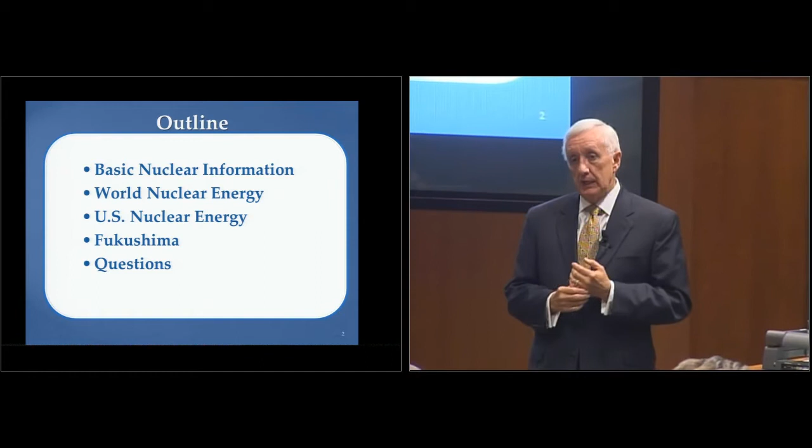It's really stark when you go to the Fukushima Daiichi plant. A lot of people don't realize it, but there's Fukushima Daini, which is about 10 kilometers from Fukushima Daiichi. So there are two different nuclear sites very close together. At the Daini plant, all four units were running, and that particular unit maintained one off-site power source, so they were able to eventually shut those down safely. Daiichi lost everything, and I'll walk through that sequence. That's why you had two sites close together—one had a very serious problem, the other ended up being shut down safely. And then the fun part is the Q&A.

So how many of you have had physics? How many of you have heard of physics? Just checking to see if you're awake.

The thing that really makes nuclear different than other forms of energy is you're dealing with the nucleus of an atom as opposed to the weak electron clouds. So what you do is you go out and find your friendly atom, in this case uranium-235. If that atom is hit with a neutron, it becomes unstable and splits into two parts.

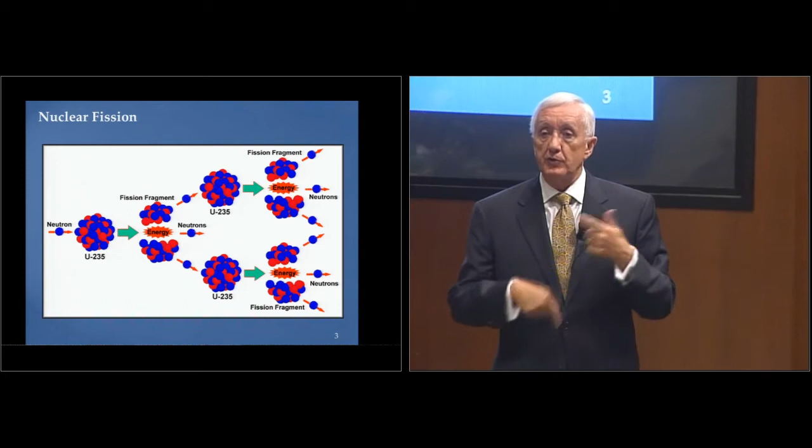Have you ever heard of this equation called E equals mc squared? So you're basically taking mass and converting it into energy. That energy, when you release the fission fragments, you have some extra neutrons left over. They will create other fissions, and so you can create a self-sustaining chain reaction. And so it's a very compact form of energy.

If you look at a number you can write on your hand and impress your friends at cocktail parties: if you create a CO2 molecule, so if you burn something, you create CO2, you get 2 electron volts. Now, you don't have to know what an electron volt is, it's a unit of energy. If you split an atom of uranium, you get 200 mega electron volts. So you get 100 million times the amount of energy when you split an atom dealing with the strong nuclear forces as opposed to the weaker electron forces when you burn stuff.

So if you want X amount of energy, you have to burn a lot more things than by splitting atoms. And that's why that little fuel pellet, about a half inch in diameter and half inch long, will have the energy equivalent of a ton of coal. So a very compact form of energy.

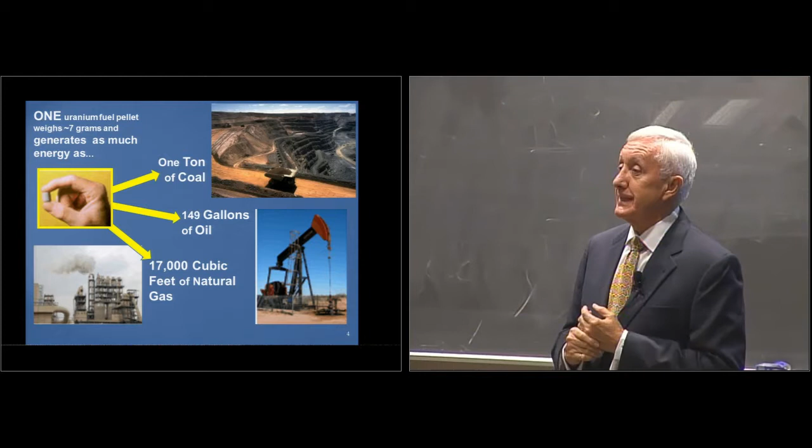I was giving a talk in Dallas a number of years ago to a high school science class, and that little pellet is also equal to 50 gallons of gasoline in energy equivalent. So this student held up his hand and said, 'Do you mean if I put that little pellet in my car, I can go for a long distance?' No, it doesn't work that way. It's an energy equivalent, it doesn't really work the same way.

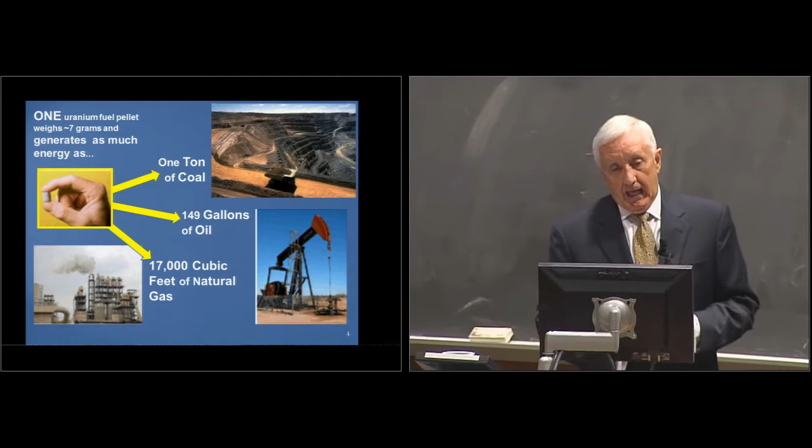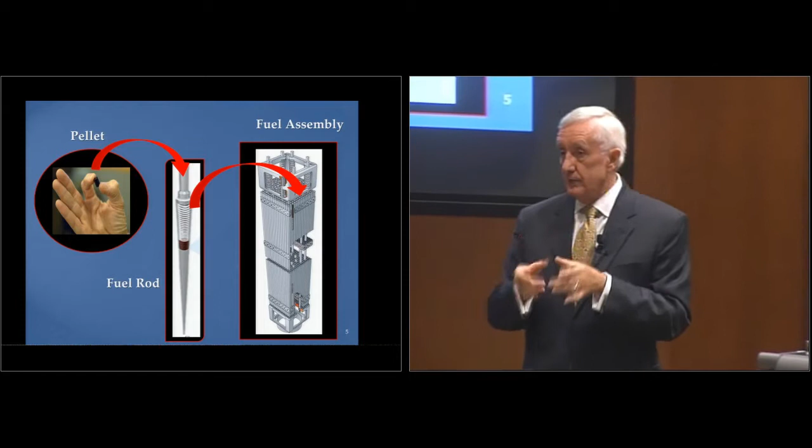So what you do in a nuclear plant is take those little pellets that, as you make fissions, get hot. You have them in a long rod, and you flow water by that rod, so the rod gets hot, and all a nuclear plant does is boil water. Just makes a lot of hot water.

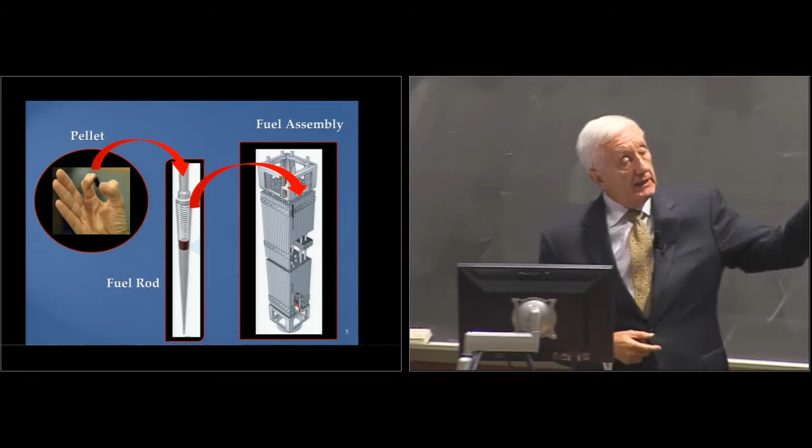The pellet goes into a fuel rod that goes into a fuel assembly. Those assemblies then go into a big vessel. In a pressurized water reactor, you'll end up having water flow by that reactor bundle, and it gets hot.

It goes through what's called a steam generator, where you take the liquid water and turn it into steam. That steam then goes through a turbine, like a pinwheel. When the steam hits it, it turns a shaft, that turns a generator, and that's how your electricity comes out.

When you look at a typical fossil fuel plant, whether it's oil, coal, or gas, you typically have a lot of similar characteristics unless it's a gas turbine. But for a gas steam plant, you're still turning water into steam to run a turbine.

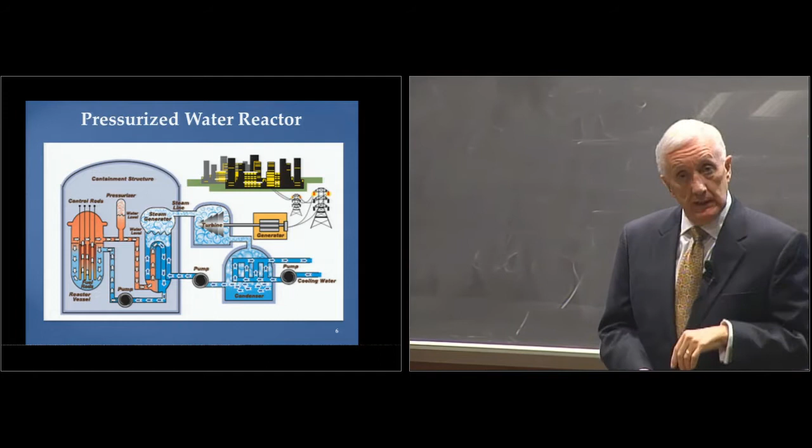In the case of a pressurized water reactor, in the vessel itself, it always stays liquid. It's under high pressure, so that water is always in liquid form. In another reactor, obviously called a boiling water reactor, inside that vessel at the top, it goes from liquid to steam, and then that steam goes through the turbine. It's condensed and comes back into the reactor.

So both have closed loops, but in the boiling water reactor, you actually make the steam at the top of the vessel that goes into the turbine. The kinds of reactors that occurred at the accident at Fukushima Daiichi were boiling water reactors.

Both are safe. I used to say it's like, would you rather have a Ford or a Chevrolet? With the high cost of construction of these reactors now, it's more like a Mercedes or a BMW. So it sort of depends on your preference, but both are safe, just slightly different.

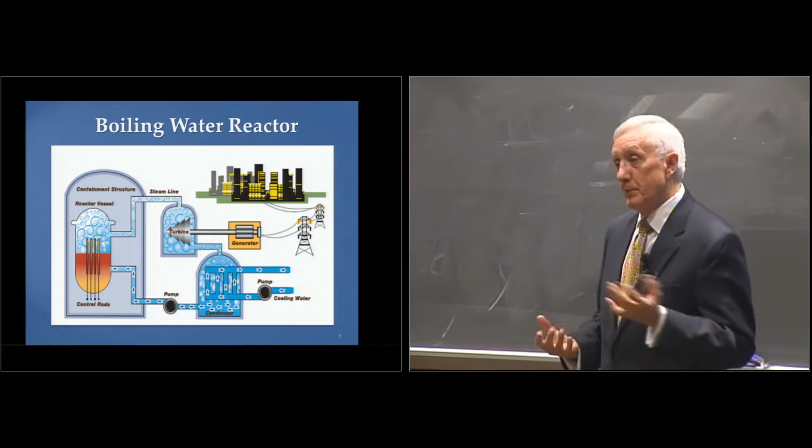If you look at the world situation, one of the reasons people have nuclear power plants is energy diversity. I don't care what form of energy you have, it's not perfect. If there were a perfect form of energy, we wouldn't be having energy debates. So basically, you don't want all your eggs in any one basket, so you want diversity because you don't know what the future will hold.

The other advantage of nuclear is that it's sustainable. There's a lot of uranium around, and if the uranium price gets high enough, you can go to a breeder reactor and convert uranium-238 to plutonium-239, and actually make more fuel than you consume. So in a breeder reactor, if you have a 1,000 megawatt electric plant and you put the fuel in there, it will generate enough fuel for itself plus 3 other reactors. So breeder reactors can go for centuries.

In fact, if you look at the weapons program, there's enough depleted uranium at Oak Ridge National Laboratory, and also at some sites in Kentucky and some in Ohio, that there's enough uranium to supply all of our electrical needs in the United States if all were generated by nuclear, for 700 years, if you put that in a breeder reactor. So it is definitely a sustainable form of energy.

A lot of countries look at nuclear for economic reasons. Now, it turns out that's not the case now for the United States.

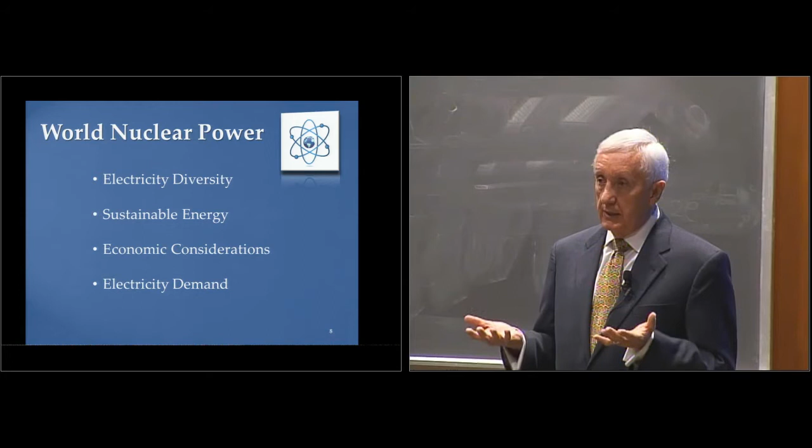I was in India a few years ago, and I was surprised to learn that 60% of the population in India does not have electricity. And you think of the population of India, if they're going to get their economic society elevated, they're going to have electricity, and they can't do it just on fossil fuels alone. So they have a very expanding nuclear program.

So if you look at the world situation for reactors today, there are about 435 around the world. The United States has more reactors than any other country. You hear a lot about France, France gets 80% of their electricity from nuclear. But the United States has more reactors, they just have a higher percentage.

So usually when you think of France, there are 4 reasons they get 80% of their electricity from nuclear. Do you know what those 4 reasons are? Any guesses? They don't have much, so the 4 reasons are: no oil, no coal, no gas, no choice.

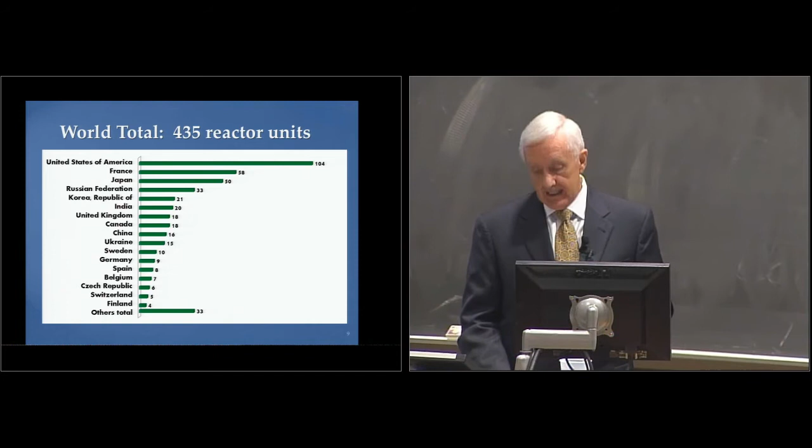So their situation, if they want to be energy independent, they had little option. They made a policy decision as a country to move into the nuclear world. It was with U.S. technology, but they've done very well developing it within their country. When you have only one utility company that's government owned and one reactor vendor that's government owned, you can standardize and drive your policies in a much different way.

If you look at the reactors under construction, there are about 63 reactors under construction around the world. China is the gorilla in terms of new construction. They have 26 reactors under construction, a massive program. They're also bringing on about a 1,000 megawatt coal-fired plant every week, so the demand for electricity in China is huge. And when you think about the pollution that coal results in, it's good to have a diversified program.

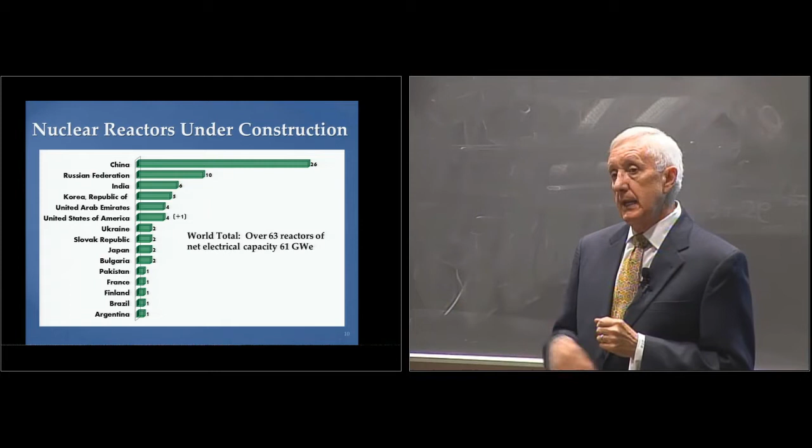Russia is second at 10, India at 6, UAE has 4. United States has 4 new plants under construction, 2 in the state of Georgia by the Southern Company, and 2 in the state of South Carolina by SCANA. And then TVA is finishing a plant called Watts Bar 2 that had been stopped. It was about 85% complete when they stopped construction, so they're finishing it now. So the U.S. really has 5 plants underway.

So if you want to go out to your friendly vendor and you want to buy a reactor to put in your backyard, it'd be nice to know what your choices are. There are really about 5 choices that we have today for reactors.

There's the economic simplified boiling water reactor that General Electric has, the ESBWR. And then in the middle right, the AP1000 is Westinghouse. Both the AP1000 and ESBWR are passively safe designs.

So in the 90s, the industry looked at what they could do to make reactors simpler and safer. General Electric did a design for their boiling water reactor, and Westinghouse did their design for the pressurized water reactor. Both of those reactors are simpler and safer.

And so as a recovering regulator, as Varun indicated, I was chairman of the Nuclear Regulatory Commission. If you have something that is simpler and safer, that is good for the industry, it's good for the American people, and it's good for the industry as a whole. So both of those reactors are what we call the new generation.

There are other reactors under consideration. Mitsubishi Heavy Industry makes the US APWR. There are 2 sites that we're considering that design. Have any of you heard of Comanche Peak?

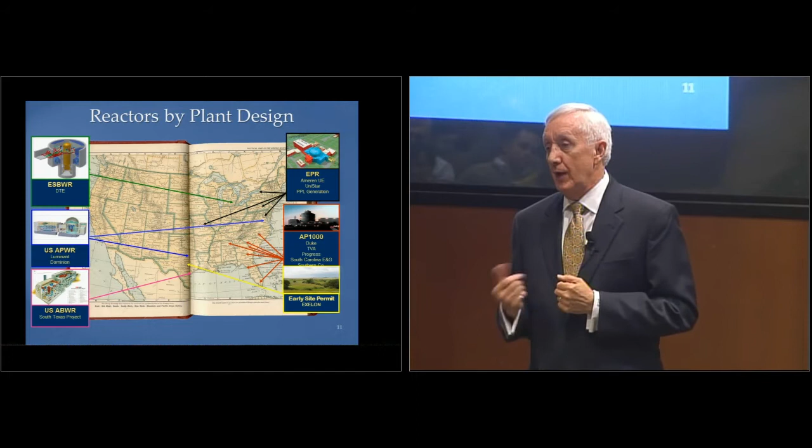How many have heard of Dallas-Fort Worth? Just checking. So Comanche Peak is near Dallas-Fort Worth. South Texas is obviously in South Texas near Houston. And at Comanche Peak, they were looking at MHI as their design.

But Westinghouse was very clever. If you look at this map, you'll notice that the AP1000s were all in the southeastern part of the United States. The thing that's interesting about that part of the world, as in the U.S., is that it's still regulated, and the growth rate was pretty high. So they had targeted that part of the country where they wanted to focus their attention, and that's where the 4 reactors of the AP1000 are being built in the southeast.

The rest of the country, for the most part, are merchant plants where a utility would have to invest several billion dollars and then they'd have to bid in on what the market would be. So if the price of gas is high, they're good to go. If the price of gas is low, they could lose the company.

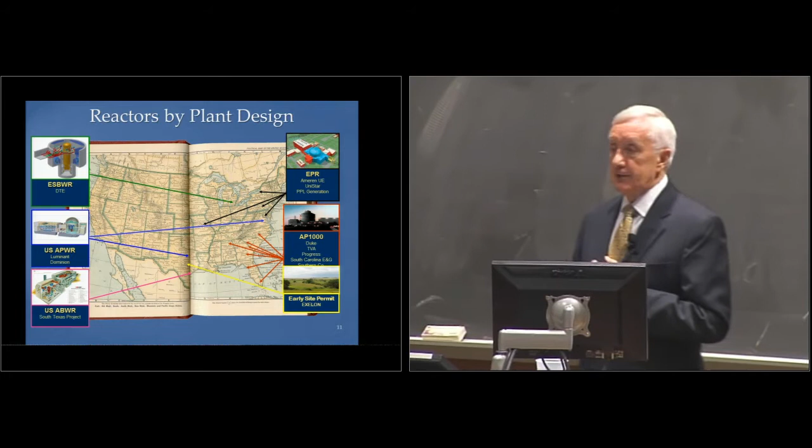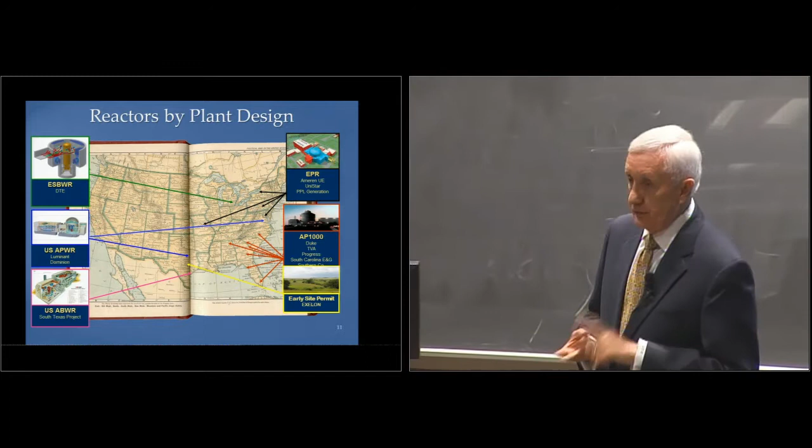The EPR used to stand for the European pressurized reactor, and it's the French version of the pressurized water reactor. It was changed from European to enhanced pressurized water reactor, so they could still keep the E word but not have it stand for Europe, since they wanted to market it worldwide. That reactor is being built in Finland, and they're building 1 in France, and 2 in China. So those are under active construction as well.

So if you look at what's different about the nuclear industry today versus the 70s and 80s, it was a very turbulent time for the nuclear industry. It was when changing regulations were occurring. In the late 70s, you had double-digit inflation, you had double-digit interest, and that caused an exponential effect on your cost of capital-intensive equipment.

What's different today is that during the early 90s, the industry looked at what could they do to make things more predictable with no compromise on safety. They changed the process from a 2-step where a utility would have to come in and get a construction permit, and then after they spent several billion dollars, they would have to come back to the Nuclear Regulatory Commission for a 'Mother May I' and say, after I have spent $5 billion, may I now operate it? That made companies a little bit nervous.

When you think about delays, and a lot of those were legal delays, just calculate the daily interest on $5 billion at 5% interest, and you'll find out that that is a fairly large number. And if you look at some of these delays that were tied up in the courts for up to 4 years, that is a huge amount of money that companies would have at risk.

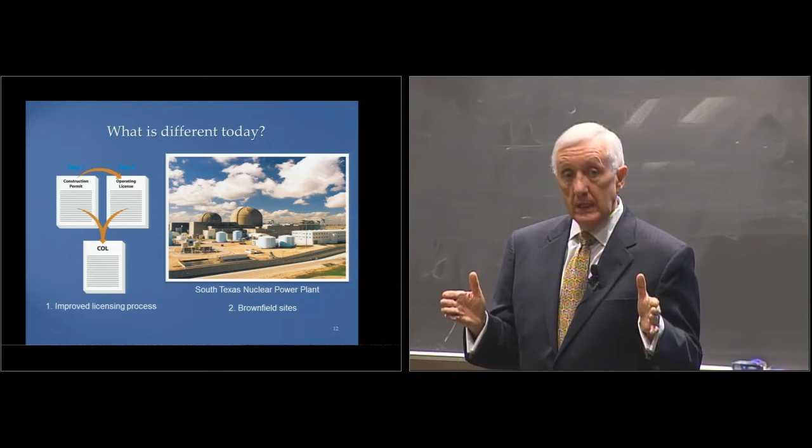So what the industry and the regulator, the NRC, looked at was changing the process, with no compromise on safety, where they would do a combined construction and operating license, the COL. A company will have to get a design certified by the NRC. In the case of the AP1000, Westinghouse came in with their design. The regulator went through all those designs, a lot of questions, and then they basically certify that design. Then during construction, the NRC will inspect it to make sure it's built as they said they will build it, and they will do tests along the way. Then assuming everything is satisfied by the regulator, they can operate it.

Much like we do that for airplanes. You don't license every single airplane. You do an airplane design, you certify it, then you manufacture them according to specifications, and then you can fly them.

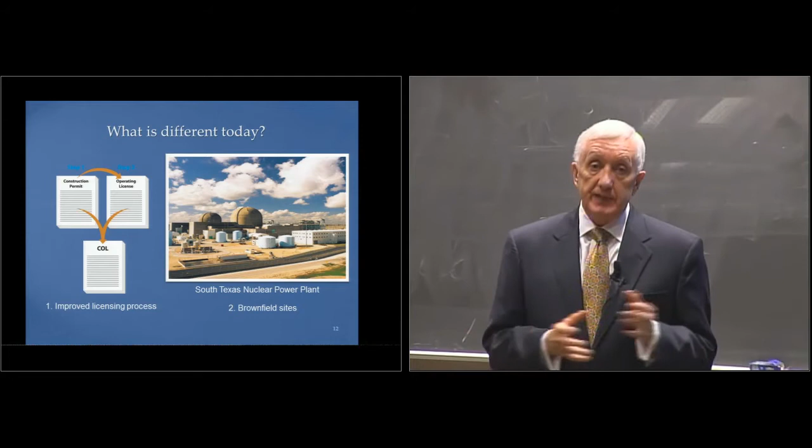The other thing that happened in terms of the industry, most of the 28 plants that were under consideration were at brownfield sites. In the case of Comanche Peak, that site was originally designed for 4 reactors; they only built 2. South Texas, they built 2, again designed for 4. At the Vogtle site in the state of Georgia, where they're building 2 more, it was designed for 4; they only built 2. So most of the new reactors under consideration were at existing sites where these plants had been running typically for decades.

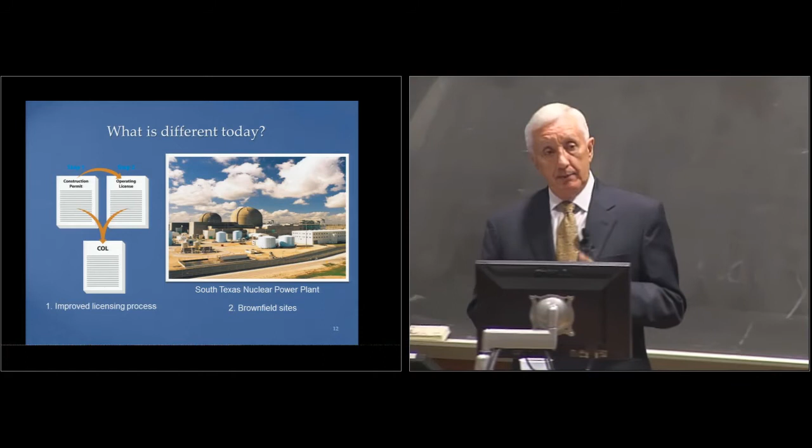So the public comfort level was much higher. You would still have opposition, but for the most part, the favorable factor was in the 75 to 85% range because the people were comfortable with it. The plant had been there for a long time. The people that ran the plants went to schools, churches - they were basically parts of the community. So it was not an unknown. Those were the 2 characteristics that really happened: improved licensing and then building at existing sites.

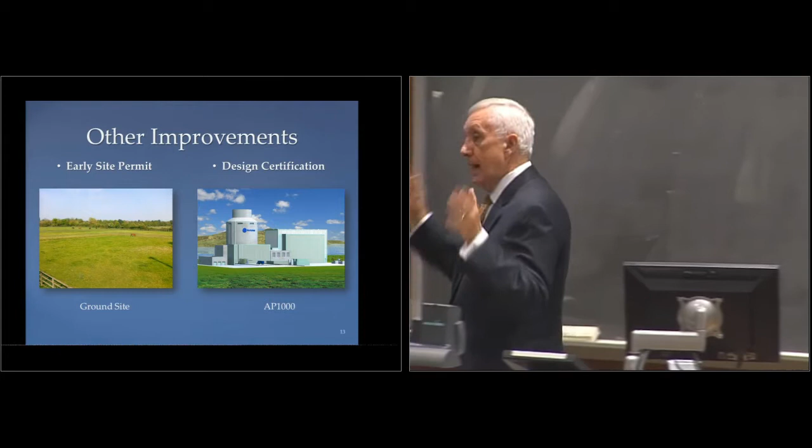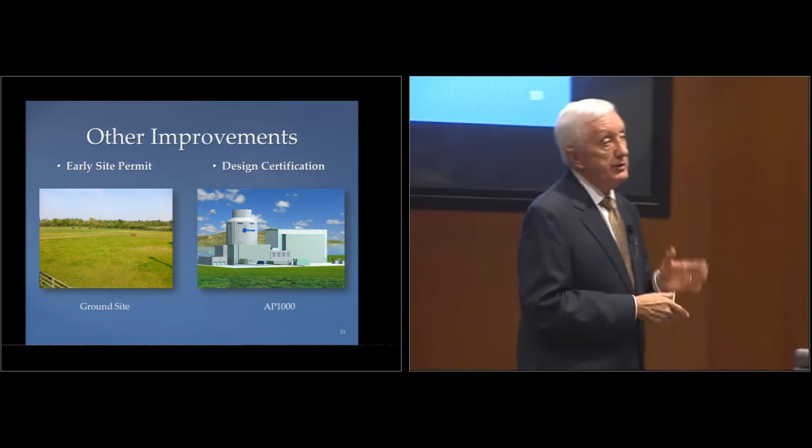The other thing that occurred is that the Nuclear Regulatory Commission did a process where you could do an early site permit. So you could basically bound the parameters, look at the characteristics of the plant, what the environmental impact is, and get a site pre-approved, and you could hold that for as long as 20 years. Then when you decide to build a plant, you can do the fine details of exactly how that plant operates on that site. So that tells you that you can do like 90% of the permitting up front with one of the standardized designs, since the designs have already been certified.

The NRC has certified the advanced boiling water reactor. They have certified the AP1000. They're going through the process of certifying the ESBWR and the US EPR.

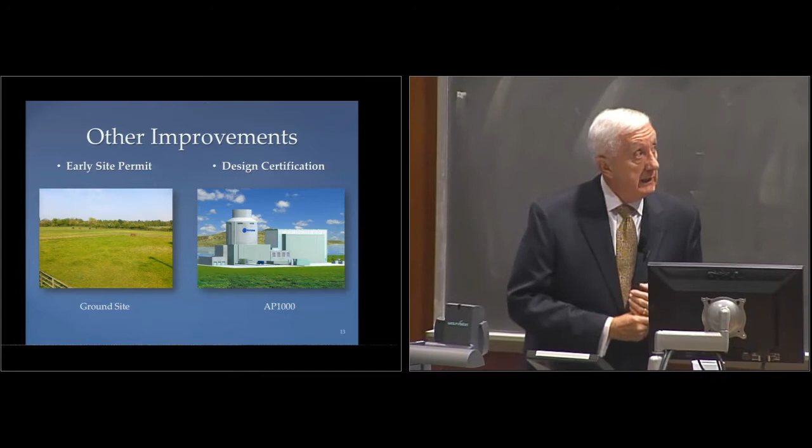Let me talk a little bit about safety. In terms of nuclear safety, what you typically look at is a defense in depth concept. You want to have multiple backups, so if something fails, you have another system that will kick in and take over. If you need a diesel generator, then you'll put 2 of them in case one doesn't start. So you'll have a lot of defense in depth.

The other thing that the nuclear industry does that is somewhat unique is that they invent an accident. They say, we don't expect this accident to occur, but if it occurs, we want to contain all that radioactive material and shut the system down safely. Typically that was called a double-ended pipe break, where you'd have a 30-inch pipe.

The thickness of the pipe was about 2 inches thick. You assume that for whatever reason that pipe would move apart, water would come out of both ends, and you would design your system to contain that release of pressure and the radioactive material. That's why you see these big containment domes around reactors, so you can contain that material. So that was a design basis accident.

If you look at the car industry, typically you'll put in enhanced safety features like seat belts, safety glass, things of that nature. But if it goes beyond that parameter, that's just the way it goes. It's not designed to withstand necessarily a 70-mile-per-hour crash, and so they don't design those in a robust way.

Most countries have independent regulators, and the NRC is an independent regulator. It is not part of the executive branch. When I was chairman, I had oversight by Congress, but I was not considered an executive branch appointment. I was a presidential appointment, but I did not report to the president per se, because once you're confirmed by the Senate, the commissioners are in there for the duration of that appointment. So independent regulators is a very important consideration, so there's a check and balance on behalf of the public.

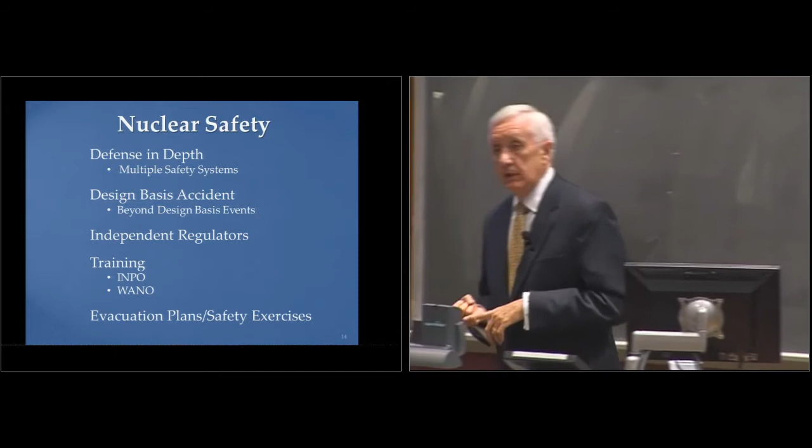The other thing that occurs in the nuclear industry for safety is practice. You do drills, exercises, systems, emergency evacuation drills, all of this planning and exercises. About once a month, I would go into the emergency operations office at the NRC and conduct an exercise. We would invent an accident. The utilities knew it was coming, so it wasn't a total surprise, and we wanted to make sure they knew how to respond.

So we would do terrorist activities. We would say, okay, your diesel generators are not going to start. We didn't have to justify our assumptions. We said, these are the assumptions, deal with it. It's sort of like that ship in the desert - you don't worry about how it got there, you just have to deal with it. So as a regulator, you can do that to those licensees.

When I was director of our nuclear program here at Texas, we had a research reactor at the Pickle campus - it used to be in Taylor Hall, right in the middle of campus. I was licensed by the NRC, and I can tell you it's a lot more fun being the regulator than the regulatee, so it depends on which side of the desk you sit on.

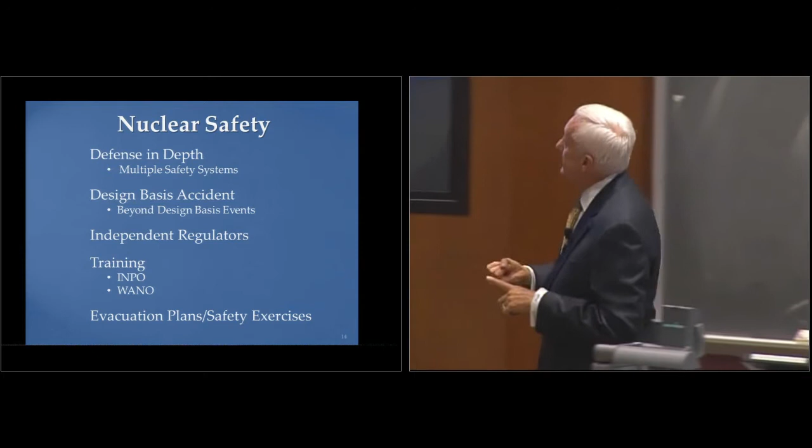When you look at nuclear safety, and you look at all of those defense in depth, design-basis accident, all of those sort of things - almost every one of those failed at Fukushima. Almost every one, and I'll go through and talk a little bit about what happened.

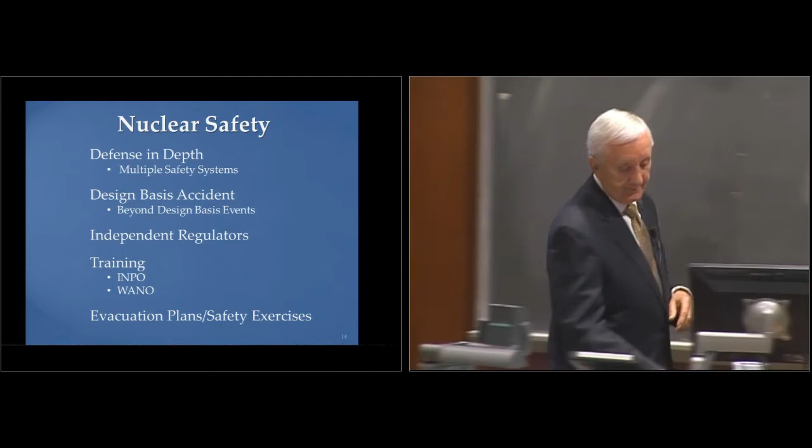It was a beautiful area, very scenic, and they used the ocean as their heat sink for condensing their steam back into a liquid.

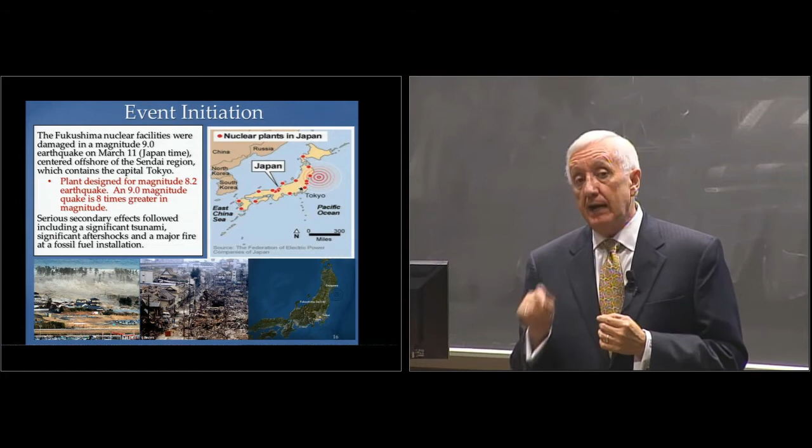The first thing that happened was the earthquake, and it was a very big earthquake. The plant was designed for an 8.2 magnitude, but they had a 9.0 earthquake, which is 8 times stronger since it's a logarithmic scale. So the reactor had to withstand 8 times greater earthquake than it was designed for. It turns out the plant did fine for the earthquake. From what we know today, the earthquake caused little damage to the plant itself. It did take out their off-site power, but the plant itself withstood that 8 times greater magnitude than it had been expected to encounter.

After the earthquake, the diesel generators started up like they should have. They ran for about 40 minutes, and then the tsunami came, and I'll show you some pictures of that.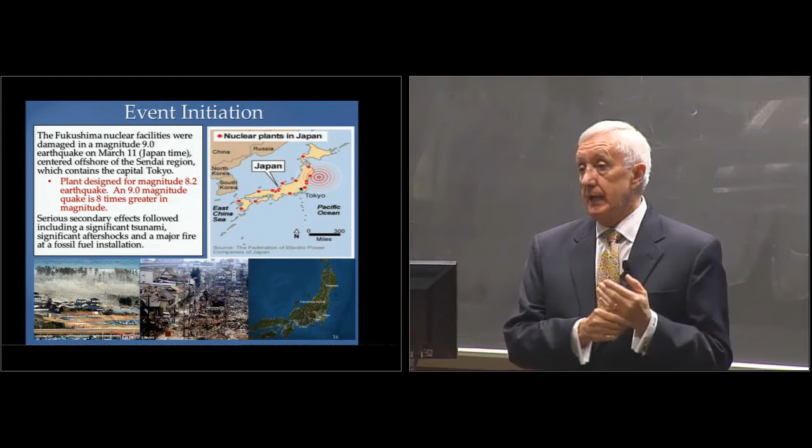The tsunami is just incredible when you look at the force and the destruction that occurred. There's a whole bunch of pictures I received of villages along that east coast showing the village before the tsunami and the village after. In a lot of cases, complete villages were just wiped out. The force and the destruction was just stunning. About 20,000 people died from the earthquake and the tsunami.

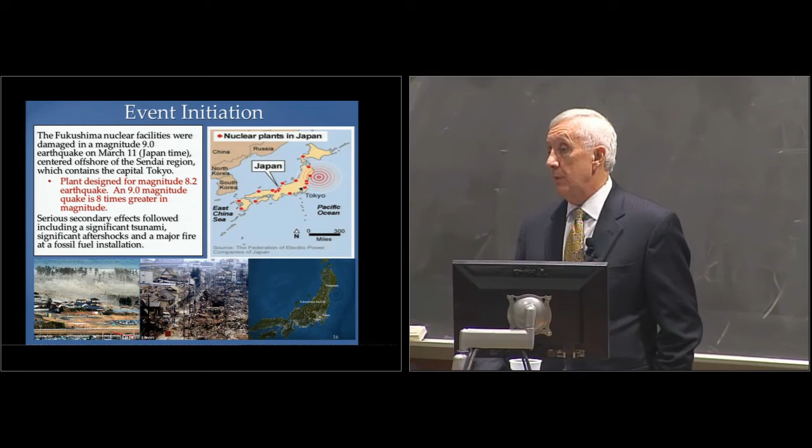You look at the forces of that water coming through in a lot of the films that showed it. This lower left-hand picture was a chemical plant that burned for 3 days and killed 11 people. But most of the attention was focused on the nuclear plant, even though no one died from the radiation, and from what we know today, there will not likely be any radiation deaths from that accident.

I think the biggest traumatic experience that community will face is having to be evacuated. Generations of families lived in this area and had to quickly leave. It's very eerie when you drive from Fukushima Daini to Fukushima Daiichi through these villages—it looked like a spaceship came over and just sucked people out. Backhoes were working and you can tell they just stopped. You'll see curtains on homes, plants still in windows—for them to still be alive they're probably fake plants anyway—but basically these villages show where people had to very quickly leave, and I think that will end up being the biggest trauma from that particular event.

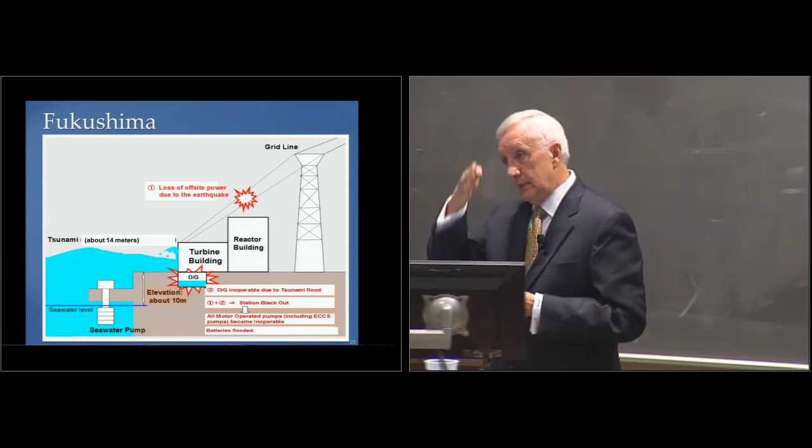Much like the fuel rod, it's hot and it still generates about 8% heat as it decays away in an exponential form. So what happens is if your reactor shuts down, you have off-site power. If you lose off-site power, then you have diesel generators that start up. In general, you need 2 diesel generators to remove that decay heat, so you have 3, just in case one doesn't start.

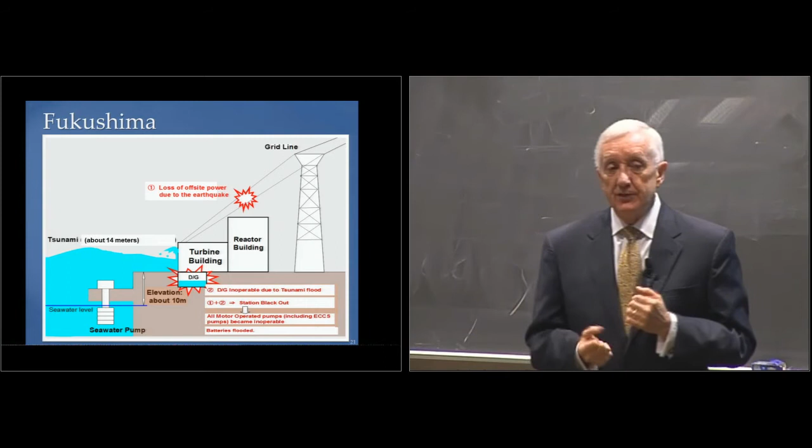In the case of Fukushima Daiichi, the earthquake caused a landslide that took out their off-site power. Diesel generators kicked in like they should have. Then the tsunami came and flooded their diesel generators, but then the next backup system is batteries. You have batteries that will run for 8 hours. The batteries did not have watertight doors, so they flooded. If you look at losing off-site power, losing your diesel generators, losing your batteries, you're going to melt fuel. You just run the numbers and it's going to melt.

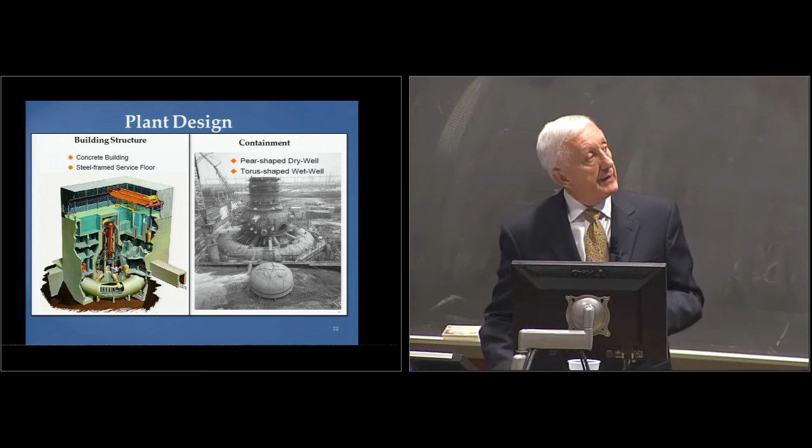So this is what the reactor looked like during construction. Again, it's a boiling water reactor. This is the top part. The containment is actually below the concrete, the gray material. So the containment is below - it is not the superstructure above.

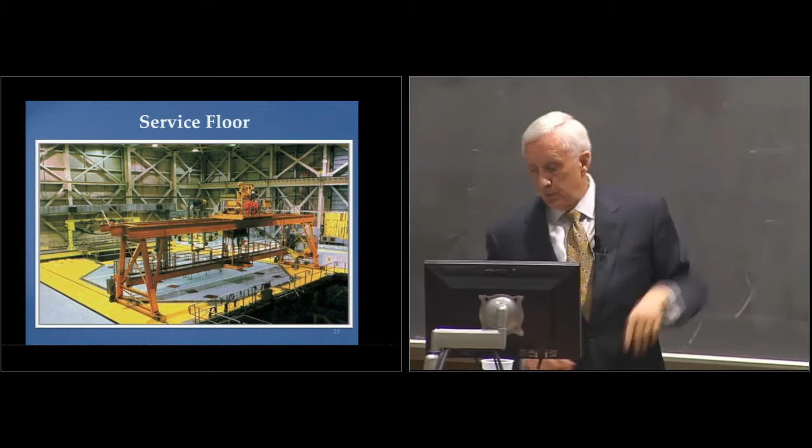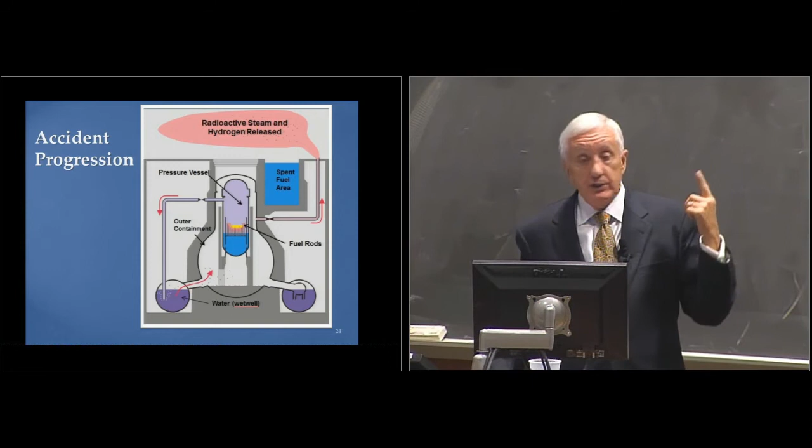As the fuel melted, you generated gas, you generated hydrogen. That hydrogen was released, and it blew. What's interesting about that explosion was the fact that it basically blew the top of that reactor off, but you don't see a lot of burning. It was just a quick release of energy, but it was definitely very destructive.

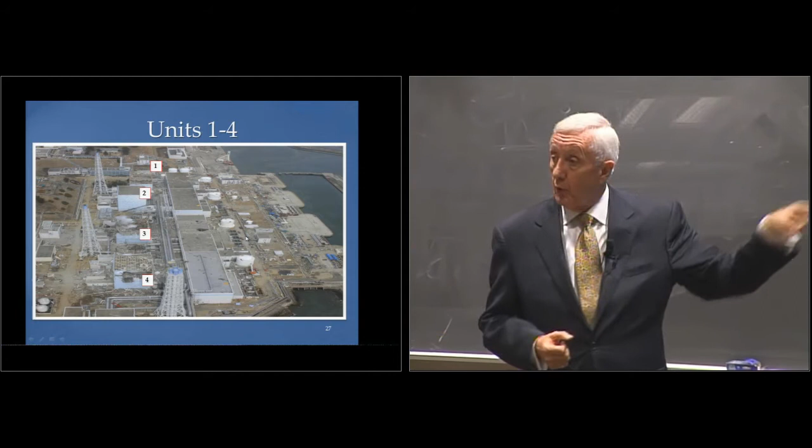You can see Unit 1, the reactor blew from the hydrogen explosion. Reactor 2 - when Reactor 1 blew, it blew the panels off of number 2, so that hydrogen went out and it did not explode. Number 3 exploded, and then hydrogen from Unit 3 came over to Unit 4, which was shut down, and it exploded. So a lot of people thought originally that they had a problem with the spent fuel pool on number 4, but that was from hydrogen from Unit 3 - they shared that common stack.

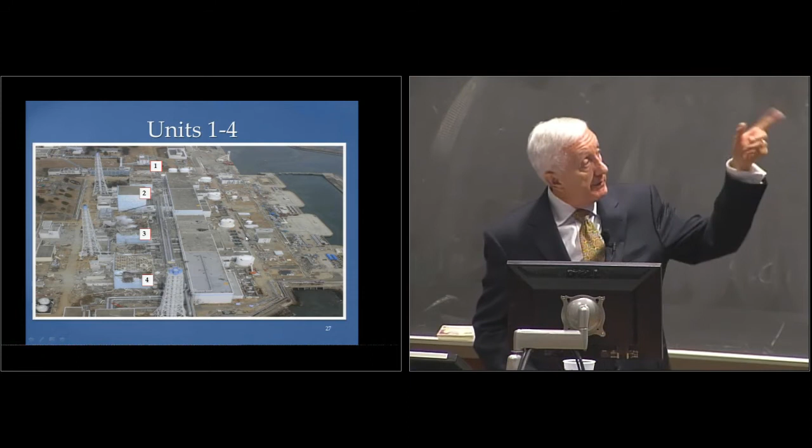I was underneath the spent fuel pool for number 4 because the perception was that it was leaking, and so I was underneath it, and the integrity was maintained.

And the amount of destruction was phenomenal. One of the generators for Unit 6 stayed up and running, and the reason was it was air-cooled as opposed to water-cooled. So they did maintain cooling for units. They cross-tied Units 5 and 6, which were both shut down. So those units are okay.

So what's likely to happen from Fukushima? There's going to be a lot more focus on station blackout. The United States had already looked at that. Why do you think we looked at station blackout in the past? The NRC spent a lot of effort.

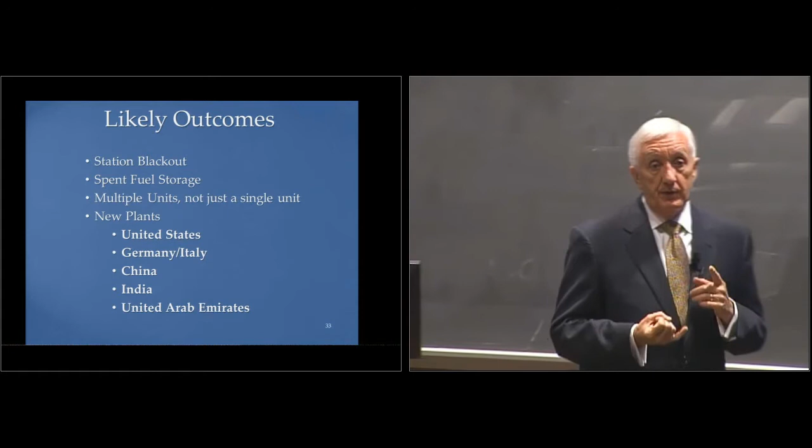New plants in the United States, basically natural gas took those out before Fukushima. So there's really very little impact in the United States in terms of building new plants. Natural gas had already taken them out economically.

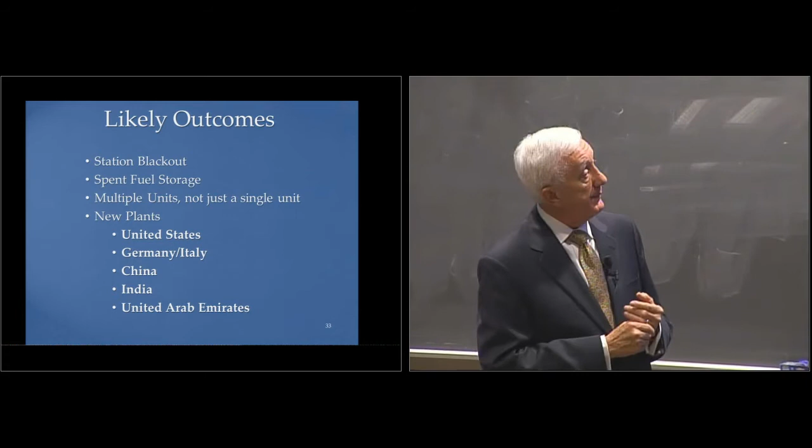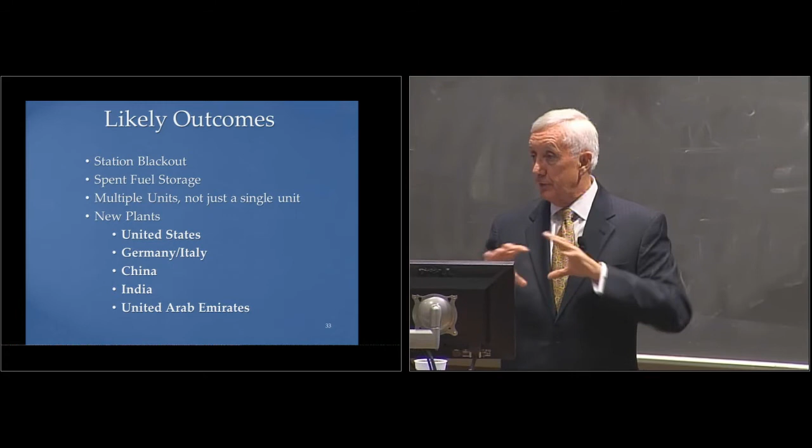Germany and Italy—it's interesting that a reactor accident in the east causes reactors in the west to shut down. But Germany made a political decision before they knew all the facts. Merkel knew that she needed the Greens to keep their country together politically for her power, and so they shut down. Italy was thinking about building plants; they decided not to. China probably for about 2 weeks said we're going to pause, and then after 2 weeks they said we have no choice, we're going to go.

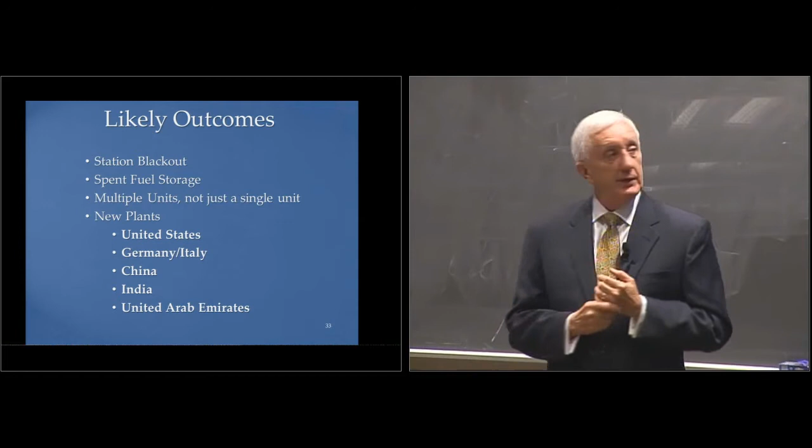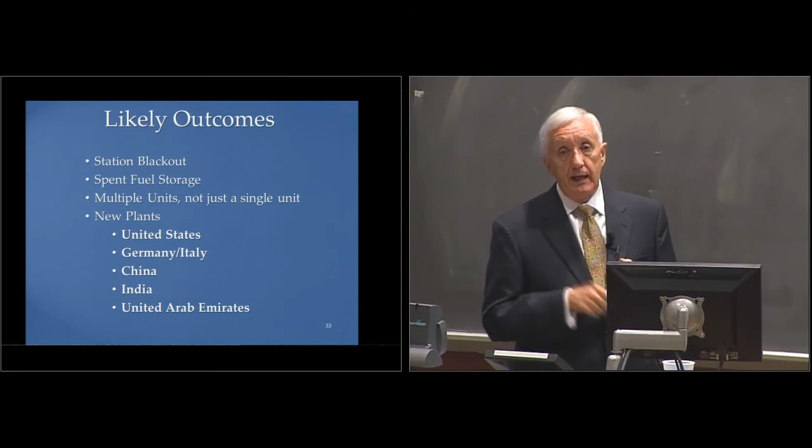India also has to look at their entire energy portfolio. They're going to continue. United Arab Emirates, as I said earlier, they're building 4. They're looking at another 4 after the first 4 are going.

Questions? I assume there's a magic microphone somewhere. And if they're hard, I'll let Varun answer them.

Thanks very much for the talk.

Curious as to why in the hours or days after the accident, why couldn't they bring in mobile diesel generators, set them up and wire them up? Was all the infrastructure too damaged to connect mobile units?

The answer is yes. They actually did bring in multiple generators. When I went to bed that night, I stayed up looking at the latest activities, and they brought in 3 portable generators. I thought that they would have had them hooked up, and then the next morning I was stunned when I saw that it had blown.

The substations were totally wiped out. They couldn't get into the roads. When I was there, I saw this huge crane—if any of you have seen mobile cranes, you'll see where they have tons of material on the back for counterbalance. This crane was moved 100 yards, just picked up and moved. So the destruction was such that they couldn't get things in.

The infrastructure was damaged. I can tell you, I went to Daiichi, and then I went to the west coast of Japan where Kashiwazaki-Kariwa is. They now are putting in huge seawalls.

They're putting in water tanks, building a big lake high, so unless you have a loss of gravity accident, they'll get the water down. They're looking at a whole bunch of portable diesel generators, and massive equipment that will move debris out so they can get equipment in. If they would have done all of those things, Daiichi never would have happened. But you're right, the destruction kept those portables out.